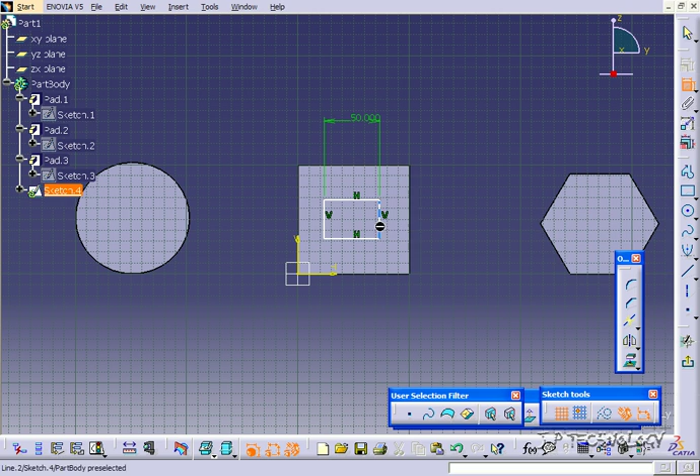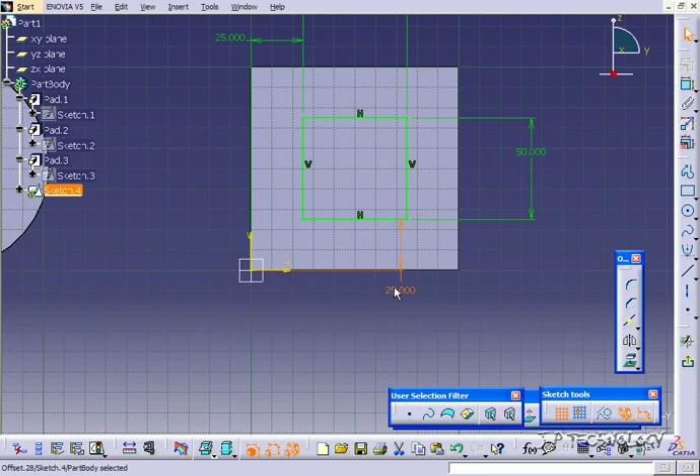So to start off, let's do one on this face here. Let's click this face, click Sketch, and sketch a square on the face. Let's dimension it to 50 by 50, then dimension it from the origin here, making it 25 by 20. Now we've got our sketch right in the center of the solid body.

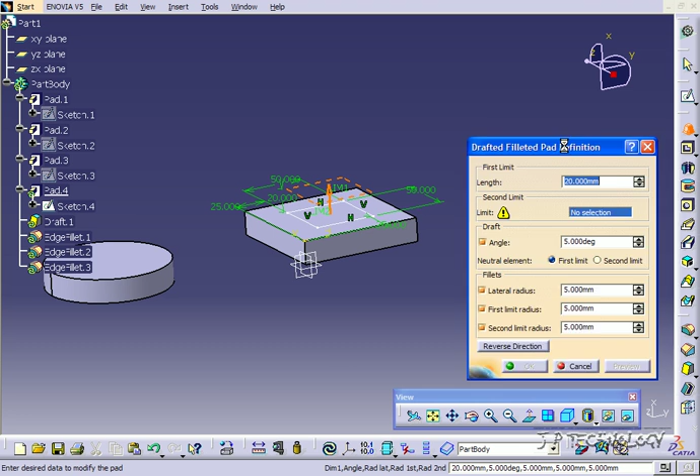So let's exit this workbench and apply the drafted fillet pad. Click on the sketch and click the drafted fillet pad, and we get the drafted fillet pad definition window. We'll have to go through it and add and select the parameters. With this type of pad, you're limited to only doing a dimension; for the length, you're not able to do an up to or up to surface with it.

For the second limit, click the face that you're extruding it off of. Click this face, and you're able to toggle on and off if you want a draft angle or if you want the fillets. For now, turn everything on; everything's set at 5 degrees and 5 mil. Leave that, and let's put this up to 50. Now let's click OK and see what we get.

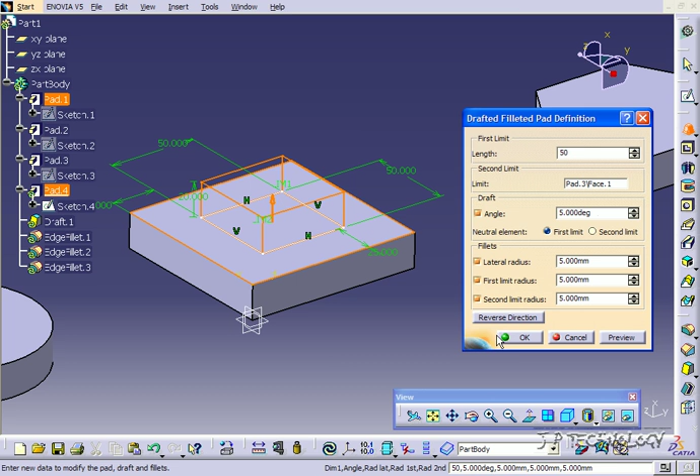And we get our extrude with the draft and the fillets. If you notice, with the draft angle of 5 degrees from the top point here, it drafted out, and when it creates this feature, you get a pad, a draft, and all of the edge fillets. From there you're able to either change the pad, the draft, or the edge fillets just by clicking on them.

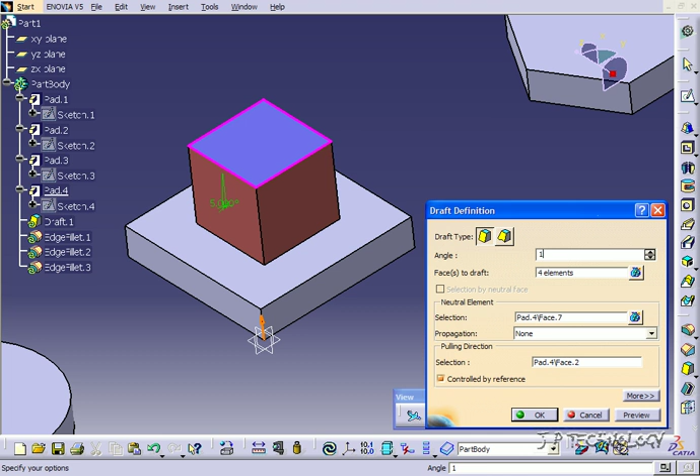So let's change the draft angle. Let's double click on it and change it from 5 degrees to 10. Click OK, and now you can see that it's kicked it out much more. Now let's delete one of these fillets, and you can see that it takes it off on all those edges. So you're able to go in and modify the pad, the draft, and the fillets after it's been made.

Instead of getting back into this one menu for the drafted fillet pad, each of them creates its own feature under the part body.

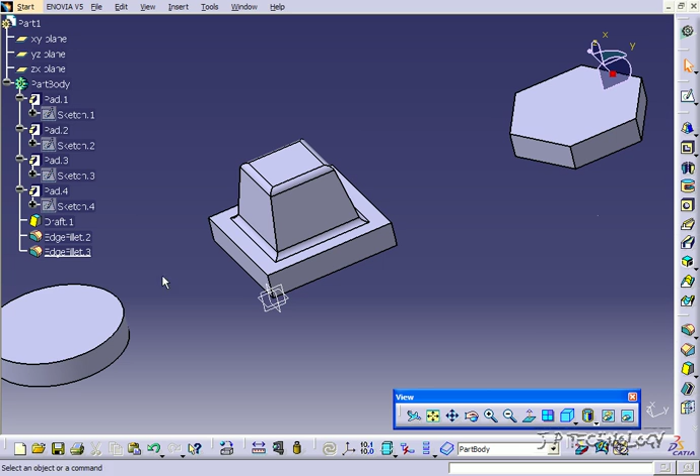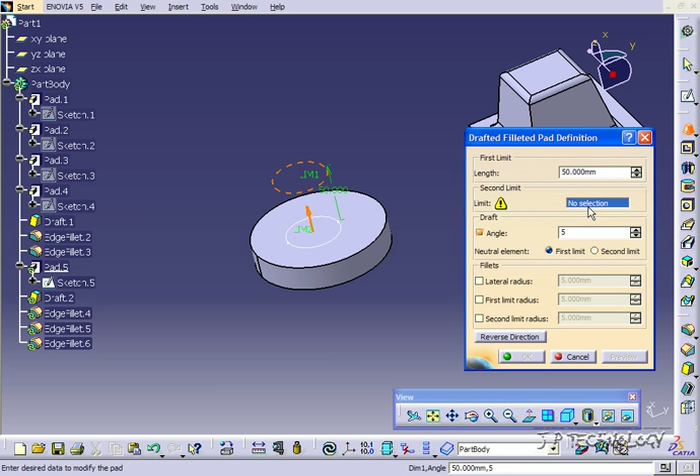Now let's do one on the circle here. Click this face, click Sketch, and sketch a circle close to the middle, don't worry about the dimensions. We'll go out, click on the feature, and this time let's only make a draft, so we'll take off all the fillets and make the angle here 5. For the limit, we'll choose this face here, click OK, and now we've drafted this out just 5 degrees with no fillets.

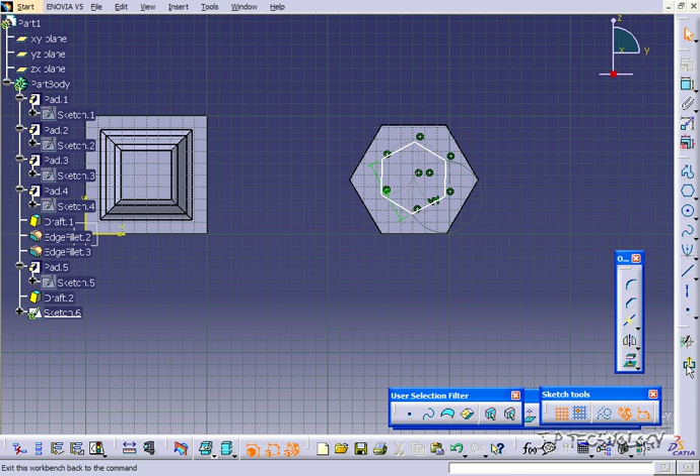Now let's do one last one on this face here. Let's click it, click Sketch, and use the hexagon—click and pull it out. Now let's go back out and use the feature. This time let's unclick the draft angle and click this face here.

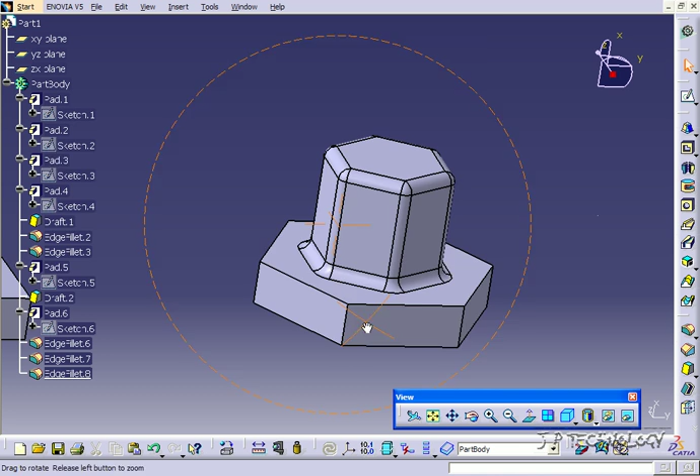So what we're going to have this time is just fillets and no draft angle. Let's click OK, and that's exactly what we get: no draft on it, just the fillets. This tool allows you to incorporate the drafts, the fillets, and the pad all in one step. Like I said, it's a time saver, as rather than going through 3 separate steps, all you have to do is one step and you get your 3 features from the one sketch.

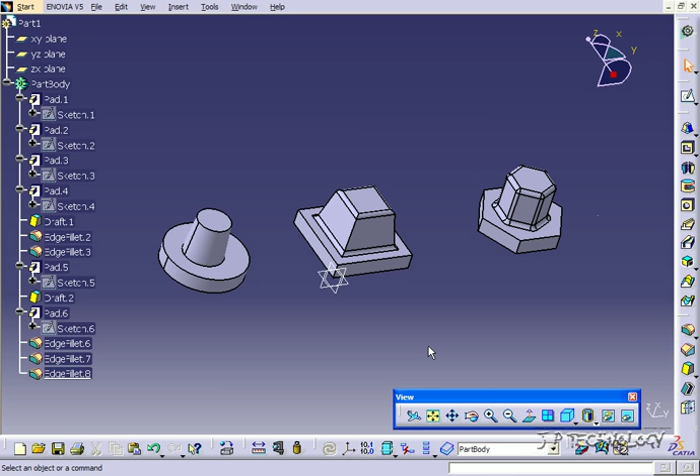And that concludes our tutorial on how to use the Drafted Fillet Pad within CATIA V5.